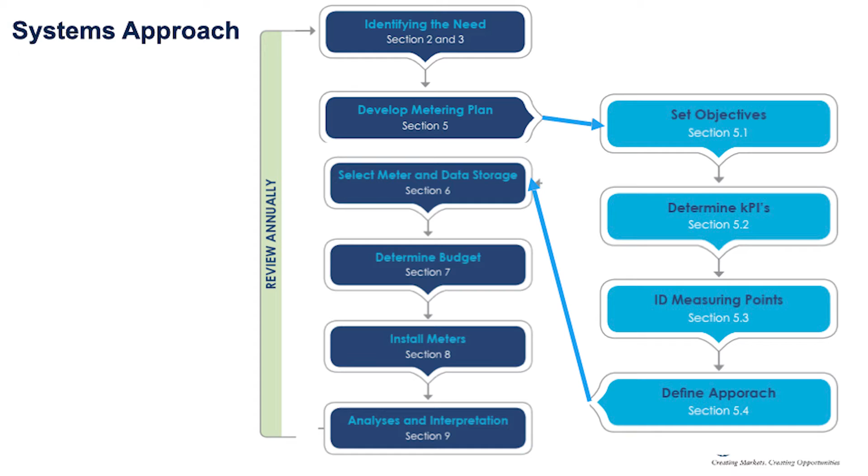A lot of that we actually make reference to other documents. And then finally, how to analyze and interpret the data. So we're going to move through each section. I'm going to give you some snapshots of the manual and just explain the thinking behind it.

So identifying the need, first of all, this is the business case. And if you look at South African cost of resource, not necessarily rural sector, but definitely in the urban sector when it comes to water, but urban and rural, if you're looking at resource costs over and above inflation, you're looking at about 4.3 times the rate of what inflation is. So that trajectory is still going up. I won't say it's a log curve, but it's still an increasing cost.

So as a percentage of your cost base, South Africa, who typically would have had cheap electricity, now as a percentage, actually it's increasing. Water is becoming something that organizations are having to look at, because actually it's now as a percentage a bigger piece of the pie.

If Kevin Cilliers was here, he would say quite emphatically, installing meters does not save money. Now, I agree, but I also don't agree. Installing VSDs also doesn't save money. Installing timers doesn't save money. You've got to set the thing. You've got to use it properly. But installing meters gives you information, and if that information is used properly without doing anything else, you can save money.

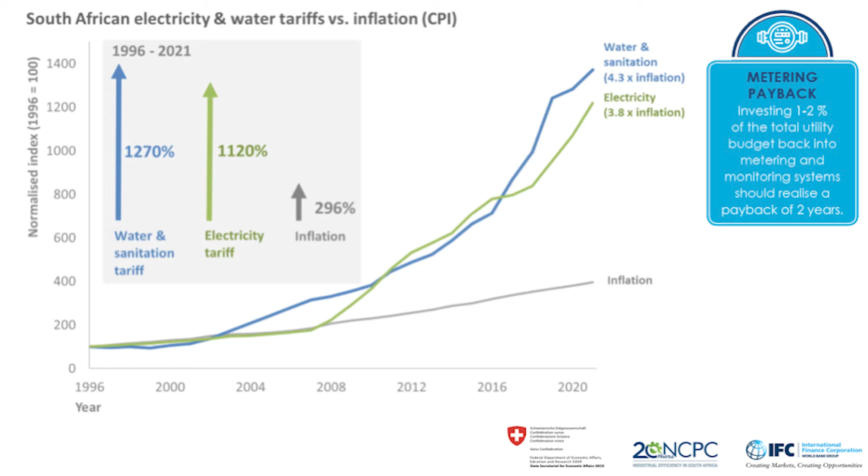Same company, different site. You can get information from your municipalities in terms of half-hour billing data, and it's very easy to take that information and to plug it into the different tariffs that are available. And this client was on a peak demand tariff, and they went to a time of use tariff, and they saved money straight away. Without that data, you cannot make a decision. With the data, you can make a decision, and the savings are there to be seen.

Now, developing a metering plan, and as we say, you need to set your objectives, and if that objective is, listen, like the Levi project that was mentioned, we don't want to draw any fresh water. They want to have a zero water footprint, effectively the target they set for themselves.

So there are two things there. You can minimize, but you're not going to minimize to zero ever. You can look for alternative water sources. Groundwater being one, the council reclaimed water being the other, rainwater being the third.

There are other water harvesting options. You can actually use a refrigerator to generate, but the amount of water they're using, that wasn't viable. But it depends on what you're trying to do. That informs your metering program. There's no point in actually having an objective and have no way of actually measuring whether you got there or not. So just some examples.

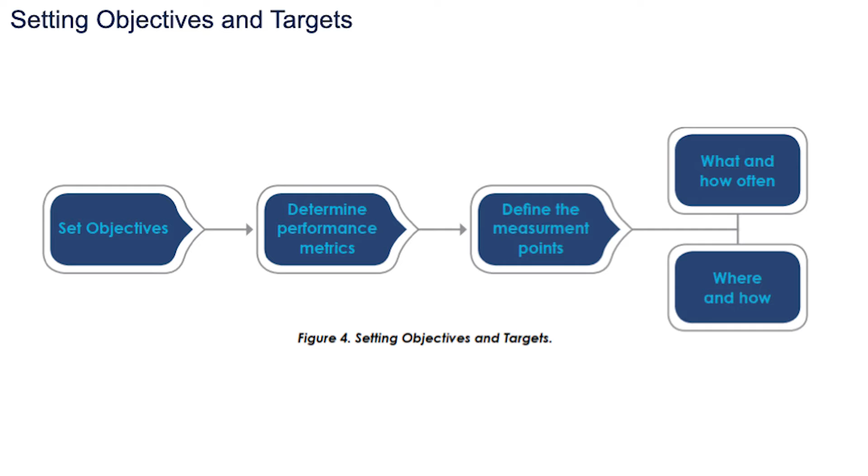If you do go into metering, you don't have to necessarily install live logging. There are different types of meterings. One-time spot measurements are entirely appropriate. So going in there with a clamp-on ammeter will tell you exactly what that pump is drawing. No need to log that continuously because it's running continuously.

Runtime measurements, so you're putting it in for a period of time, or alternatively it's giving you on-off. It's giving you the hours that the thing's running. So typically compressed air systems, you'll see that little compressor will give you an hour counter, and that's a good indication of that.

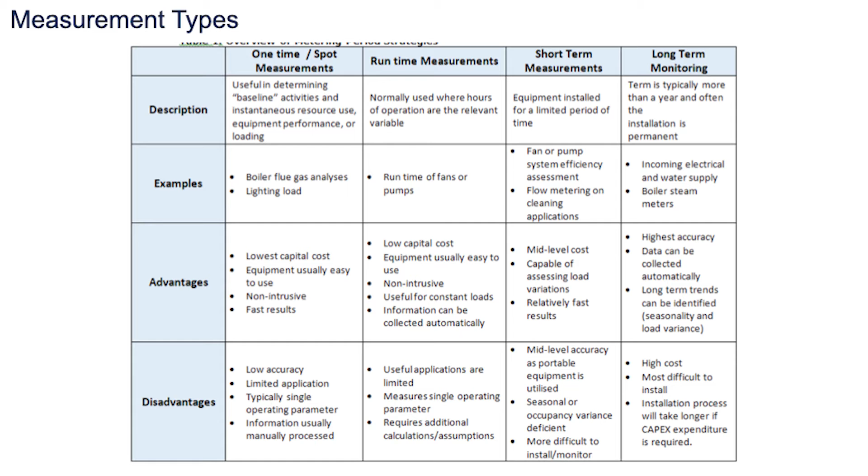Short-term measurements, and we do this often in fan and pump systems, is we'll go put kits in for about 2 to 3 weeks. And that gives you a reasonable idea. It's an expensive task, but it's cheaper than actually putting the equipment in full time. And the last is the long-term monitoring. So there are 4 measuring philosophies, and they're all applicable. So this table just tells you when you'd use what.

Water schematic, and just to go through quickly, you typically measure your departments, your boiler house, your chiller plant, your cleaning processes, your alternative supplies into the plant. So borehole, rainwater, doesn't matter, that needs to be metered. The quality needs to be metered. And now there's a difference between metering live and doing your sampling.

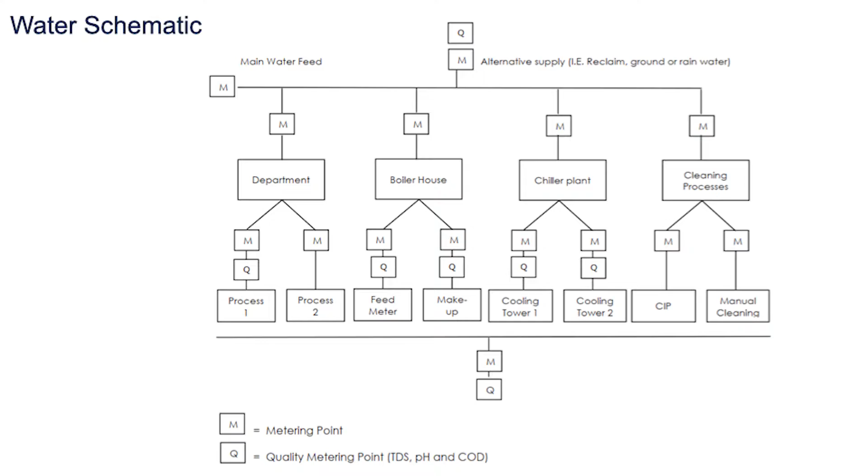So water quality going in, you're probably going to take monthly grab samples to actually check the quality on your alternative water supplies. But I've put down there the Q for quality. And under quality, we do speak about in the manual what you would typically monitor on incoming water as well as outgoing. Now listen, you can write a very thick thesis on effluent treatment technologies and effluent parameters and that sort of thing, but we're really streamlining on the important things.

So when we speak in the manual, we're speaking about COD. So organic loading would typically be something you're looking at, pH, TDS, and the reason we look for those is because those are the things that council bills them on. And this manual has been written in such a way that actually it's streamlined to ensure that the companies save money.

Boiler system, and there are a lot of systems, so where would you measure on a typical boiler system? If you've got money, so we go into quite a lot of depth. There's a way of measuring the steam rate without actually putting a steam meter in. So there's a nice little section there, and for 15,000 rand, you can actually calculate your steam rate fairly accurately, and probably more accurately than what a steam meter would do on a boiler plant. So we go into that.

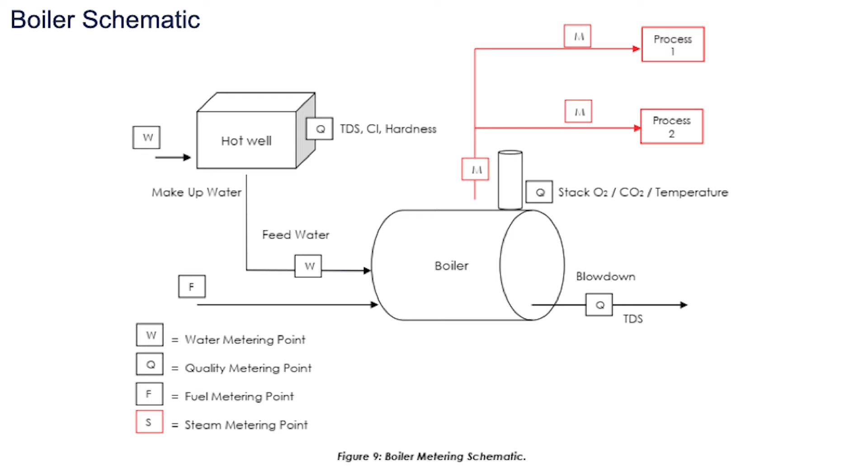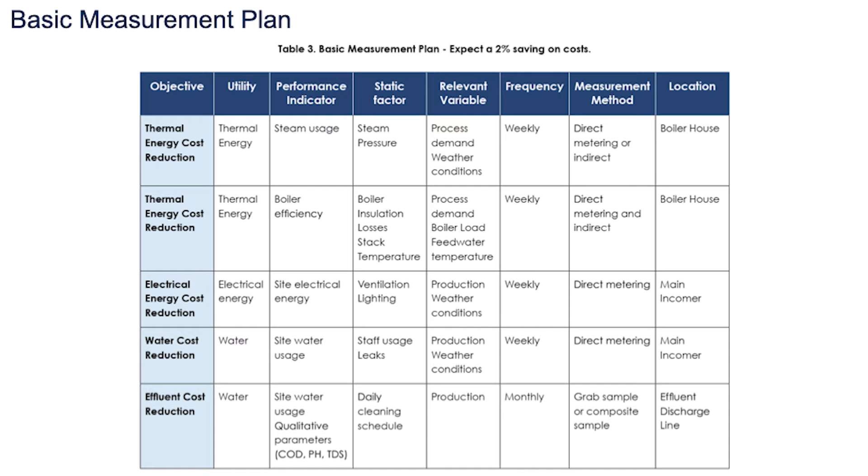So what we've done here is we've just given this table, and this is where the management system approach comes in. Someone who comes from a management system background would look at this table and think, great, you know, the maintenance engineer is going to look at this and be confused, but it's kind of giving you, okay, well, if I've got a limited budget, what should I be prioritizing in the measurements in my plant?

And that's what I call the basic measurement plan. There is what I would call a normal measurement plan, which is a different table, and then there's the advanced measurement plan, which is in this table, and that's now you're going down to the level of measuring individual chiller COP. You'd be measuring that. That means you're measuring power and you're measuring temperature and you're calculating flow. So now we're going into the advanced measurement techniques for actually being able to look at it.

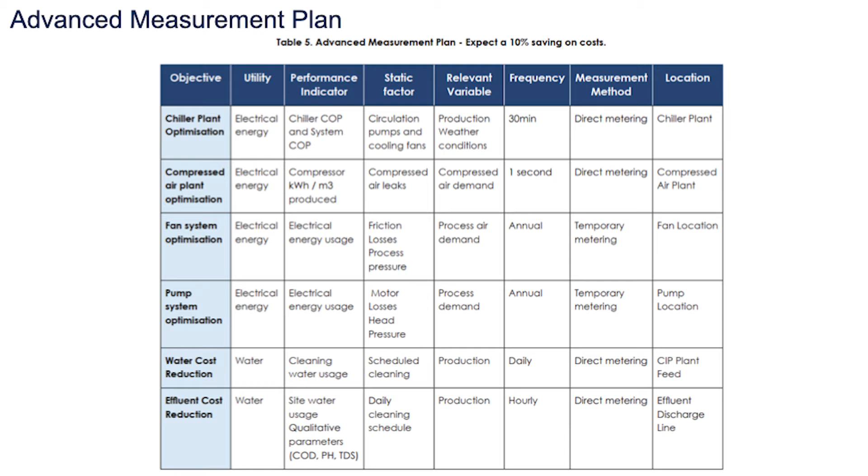So on a boiler system, you know, you would be measuring certain things. You'd be measuring the O2, and that would be modulating your fans coming in. So that's what I call advanced measurement techniques. And there we would expect 10% on resource consumption and on, well, your resource costs. Where does that 10% come from? It comes from years of experience. So I put my name there,

and I like going into plants and arguing with engineers, because often you're going in there with a lack of data. So normally, when there's no data, I put an estimate in, an educated estimate, a calculated estimate, and I'm open to the guy giving me a better estimate, because if there's no meter, you can't make decisions in a vacuum. So it's always good to put your assumptions down and let them be debated rather than actually having nothing. Because most of the plants, they don't make decisions, and the reason they don't make decisions is because they don't know, and no one's prepared to actually provide an estimate.

So I find more often than not, I go into plants and I can impact on plants, not because I'm smarter than the guy or because I know more than that maintenance engineer about his system. It's because I've got tools to help me to estimate how much his specific systems are using. And those tools have been tested, so I know they work. The UNIDO tools that are available are brilliant. They're really, really good. I've been on most of the UNIDO courses that are offered by the NCPC, and I can highly recommend them.

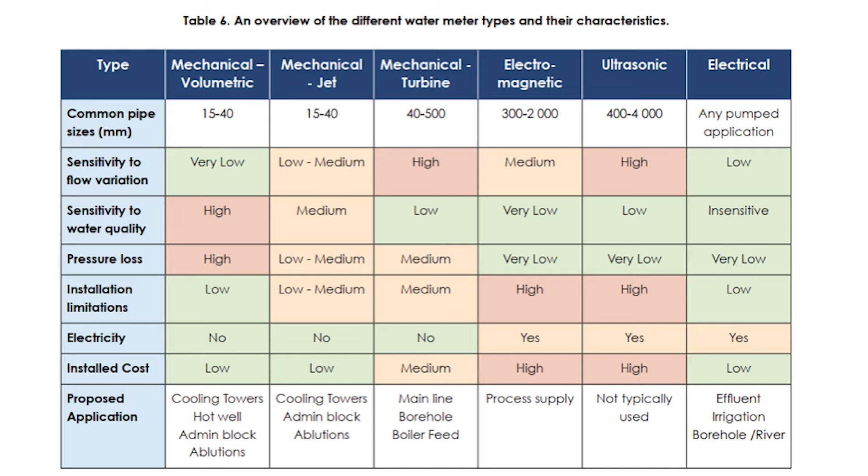So from metering, collecting the data, to storage, and again, this is the management system coming in. How are you going to be using the data? There's no point in having a guy going around and collecting 50 different meter readings, putting it into his book, which happens. I often have to go into books, take snapshots, and then load that stuff into spreadsheets because this guy's collecting all of that. Or even putting it into a spreadsheet, and everyone knows where it is in the spreadsheet, but it's not coming out. It's not triggering any response. It's not informing someone. So that last loop must work.

And nowadays, with technology that's available, especially online systems, if you can plug data in, you can get something to spit something out and tell you more or less what's going on. So there are different ways of doing that, and we just touch on that very briefly.

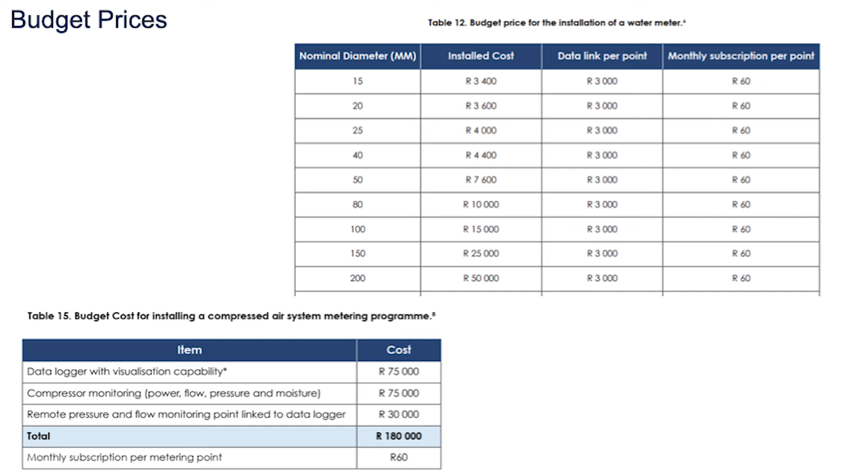Determining the budget, and I think this is the unique part about all the manuals that I've seen, is we've actually gone to the market and we've got some indications on costings. It's debatable. Obviously, it's assuming there are no complications with where you're installing. So no installation complexities. This is back in 2021. So whenever that's dated, it'll give you a rough indication of the size line, what you would expect to pay for a standard meter going into that.

And then in addition to that, you want to know, what is it going to cost for me to effectively meter a compressed air system? And we've done that as well within that manual. Compressed air systems are pretty pricey things to monitor. Those flow meters are pricey, and the data logger is pricey as well.

So compressed air systems are often measuring on a sub-second basis, not on a 15-minute or 30-minute basis. So you've got a higher spec piece of equipment that goes in there. And what we've done is each system within a plant, we're saying, okay, well, if you had an ideal monitoring system, what would that cost you per point?

So per chiller that you're going to be monitoring, more or less, what are the costs? What are the sensors that are going to go in there, and what are the costs of those sensors? I've utilized people who supply that equipment, so it's coming from actual quotes. And what we are finding, data storage, communicating and transferring that data to an online platform is increasingly getting more and more cost effective. So you'll see their monthly subscription point, that 60 Rand per point measured, that figure keeps coming down. That point, 5 years ago was probably about 200 Rand per point per month to measure. It's now 60 Rand. So the costs in some parts of these are coming down.

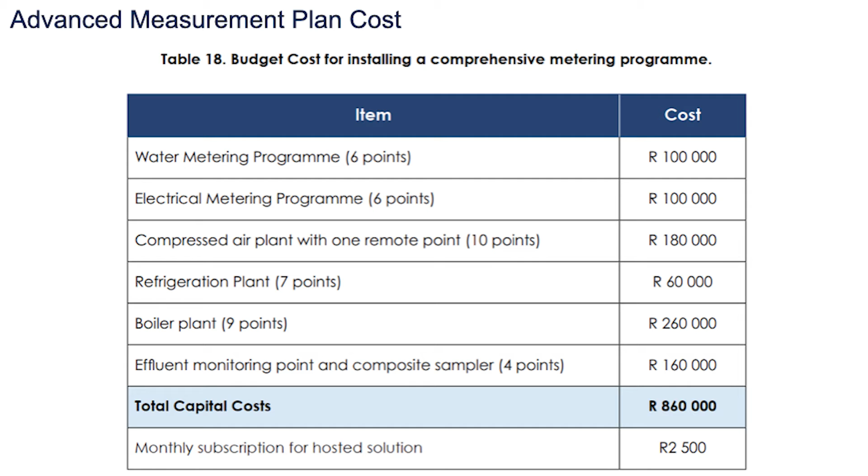Now, if you've got a little 5 kilowatt compressor, you're just going to scrap that one out. It's easy for you to take things out of what we've done here and juggle it like a puzzle to make sure that you can actually fit it for your purpose.

Here's just another case study. So I've got these intermittently put in. What we've found is companies who've put metering programs in place. I went into ABI in 2011. I did a resource assessment there. And back then they were using about 5.5 liters. It's hectoliters per hectoliter, but their ratio is 5.5. When I went back there in 2013, they dropped that down to 2.5. I think it was 2.3, 2.5, somewhere around there. When I went back there in 2020 to do the case study, they were targeting 1.7.

And their whole philosophy is they're metering just about every single water point in that plant and using the data intelligently. So it's a really good case study for a plant that's been able to consistently apply a measurement philosophy in its processes. I've got the picture of those two tanks there.

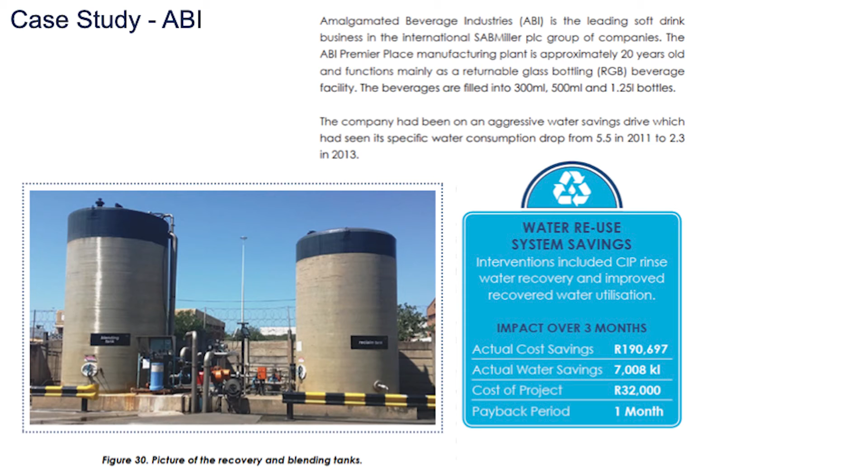One of the things they realized, they're reclaiming water from one of their processes. I think it's the incoming water, the backwash they were reclaiming. And they thought there's plenty of water available there for wash down in their pre-crate wash area, so in other words, the low care areas. But that actually wasn't the case. That one tank is a reclaim tank that feeds an area in the plant. But if that tank gets too low, it gets made up by municipal supply. And they didn't know how much was being compensated by municipal supply.

And when they started metering that, they realized actually there was a problem with the valve, and a lot of that stuff was overflowing. And they changed their control valves, they put a meter in, and as a result, they actually were able to save quite a lot of money. But they had no idea until they put that meter in place. And that meter is in between those two tanks.

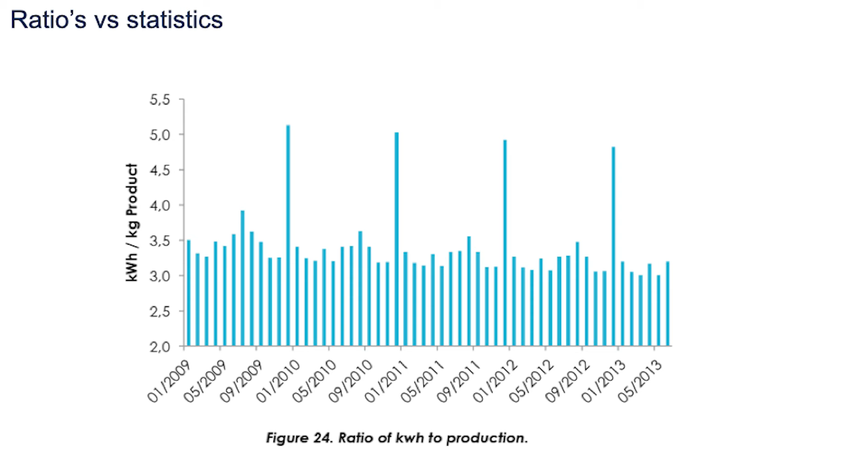So this poor guy, he's on a KPI. And every December he comes in and he knows. And no one takes the data seriously because they know, listen, low production. And we see our KPIs. The vast majority of the stock market are still measured in this way. And a lot of companies still use this. And it has its place, but it's obviously got problems.

So the way we'd recommend is using a statistical tool. I'm not going to go into the detail on a statistical tool, other than to say that you're using Excel spreadsheets and some of the regression tools in Excel to help you generate a predictive formula that's telling you, given another variable.

So if the variable is production, how does that influence my resource usage? So yeah, we can see production has quite a strong influence. So in that plant, we actually developed a model to say, okay, well, given the different levels of production, what are we expecting to use? So that's what regression analysis allows you to do.

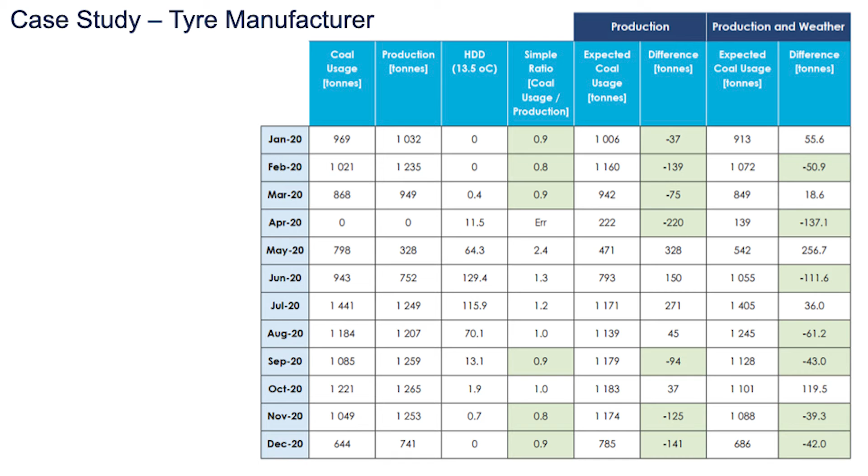But then we notice, actually, production has a role to play in terms of how much energy they use. So we developed a little statistical model, and this is coal consumption. The statistical model spits out what the expected consumption is. This side's showing you what their performance is against what we expected. There's green, you're struggling to see it, but you'll see here, for instance, in April 2020, we're not using intensity anymore. So we can actually predict during the COVID month how much coal they should have used.

And where's that coal going? It's to keep their system warm. That's what radiation losses are costing them. So statistical models will help you to predict your baseline, your base load. Then finally, we said, okay, clearly winter's got an impact. So we developed a model which took production into account and took winter into account, and some interesting things happened. Again, we were able to predict in April 2020 what their consumption should have been given weather data.

But this data point over here, which is June, for both the intensity target and for the production target indicates that they were actually inefficient. When I plug it in there, it actually shows no. For that month, they actually did quite well because temperature has an impact on how much energy they're losing in their system. Now, if you think of a rubber plant or a tire plant, there are two things in it: radiation losses in the system, but also the compound itself. They've got to heat the compound. The raw material's coming in cooler. So it makes sense. You would always need to take temperature into account in this process. So this is the model we developed, and that's how we use the regression analysis.

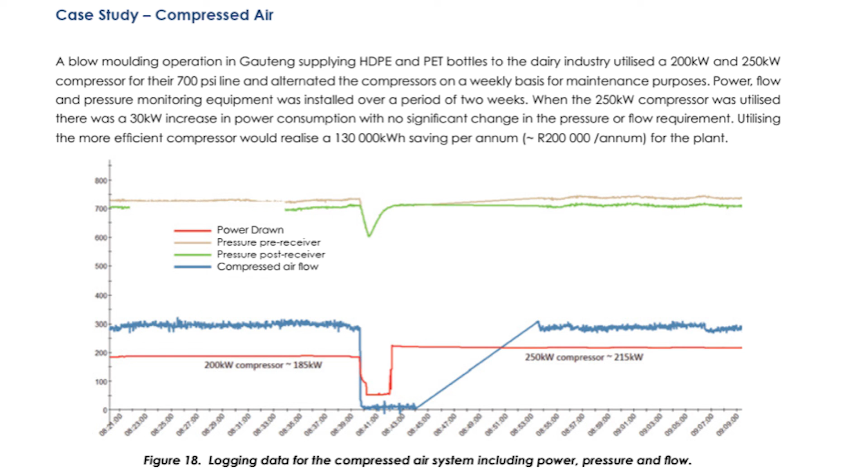So information like that helps you with your decision making. What we find often is that maintenance engineers like rotating their compressor usage, and they'll run the one for one week, run the other one for another week, and clearly in this situation it would have been better to run the more efficient one for a longer period of time.

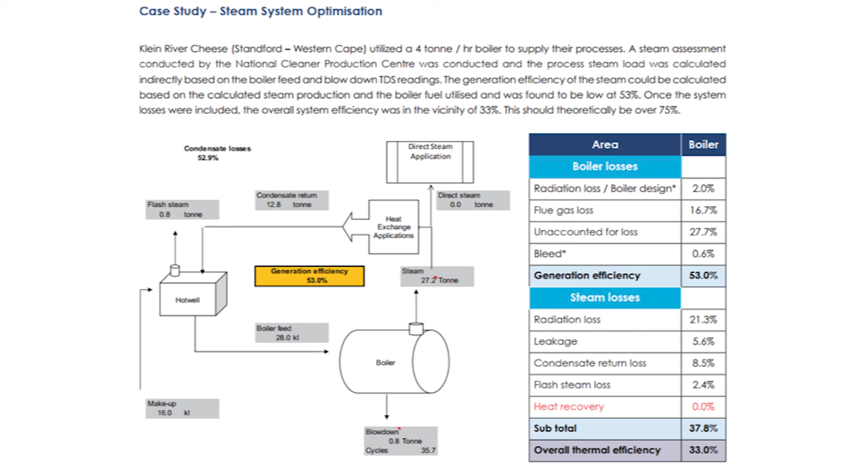So the last case study is using the tools that we spoke about in the metering guide. You're able to determine your overall boiler thermal efficiency, and that's what we've done over here. We worked out what their generation efficiency was, looking at flue gas analysis, but also looking at fuel in versus steam out. We were able to calculate what the line losses were, and the overall system efficiency came in at about 33%. So for every 100 kilograms of coal you're putting in, you're only getting 33 kilograms of useful energy out. So clearly there's a problem there. This plant decommissioned the steam boiler, put in a hot water system, and as a result improved the overall system efficiency to about 80%, with significant savings.